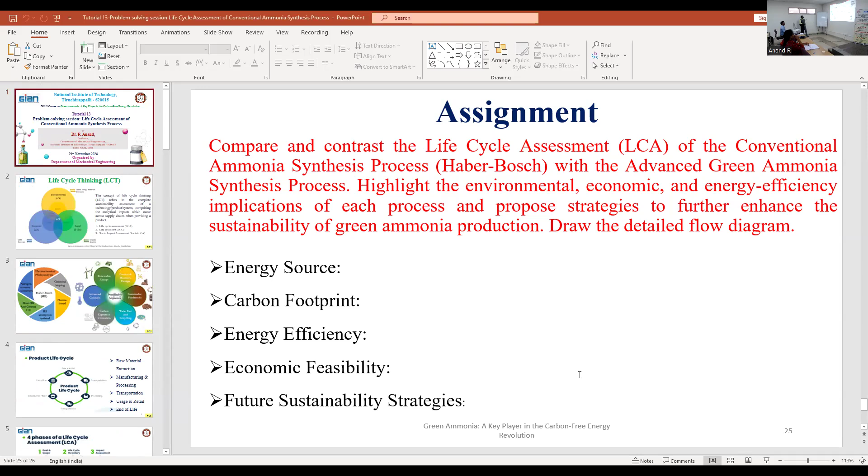The first session, the forenoon session, we have tutorial 13. After the break, we have tutorial 14 that we are going to take to our department for demonstration of the solar photovoltaic, how renewable energy can be brought in for ammonia generation. Then we are going to demonstrate the microwave pyrolysis and thermal gasification system. If possible, we can also give a demo on electrical panels.

This is the most important part of any implementation of the project. For any new projects, government or institute or startup, we need to plan for any new kind of project, and the LCA is very, very important.

We're going to talk about the social, economic, and environmental aspects. When you are focusing only on the environmental perspective, it's called Life Cycle Analysis. If you are focusing on the economic perspective, it's called LCC, Life Cycle Cost. Then if you are talking about the social perspective, it's called Social Life Cycle Analysis.

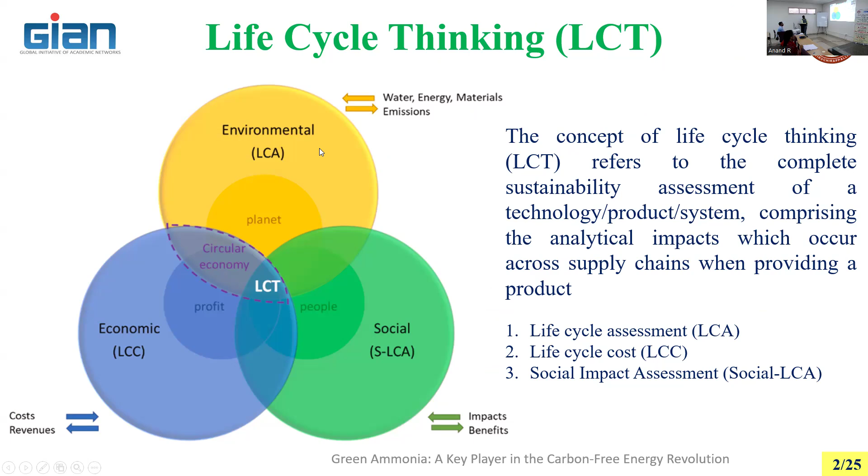Continuation of the life cycle thinking - in this workshop we are speaking about the Haber-Bosch process, and the replacement of Haber-Bosch with a different method, which we have discussed. So the ultimate aim in doing LCA for this Haber-Bosch process is to replace Haber-Bosch with new methods.

So in that case, you need to think about replacing Haber-Bosch with renewable waste-based methods. What are the social, economic, and environmental perspectives for development of this new concept? We are interested in sustainable ammonia. So ultimately, life cycle thinking means we need to produce ammonia in a sustainable manner, by bringing together the three categories of economic, environmental, as well as social analysis.

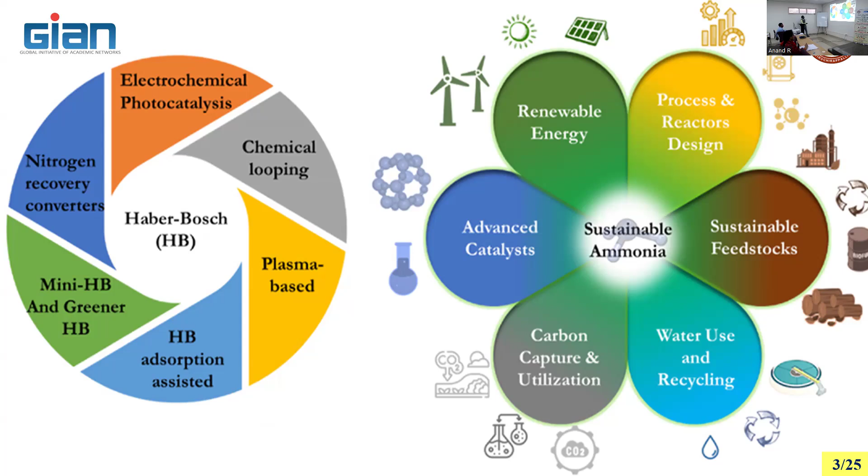So if you are claiming that you're going to produce ammonia from water, then you need to prove that - we are not going to bother about it initially, but the way in which you are producing ammonia matters.

How is it going to be, in terms of social perspective, economical perspective, and environmental perspective, superior to the Haber process? You need to prove that. Then you can refine it later.

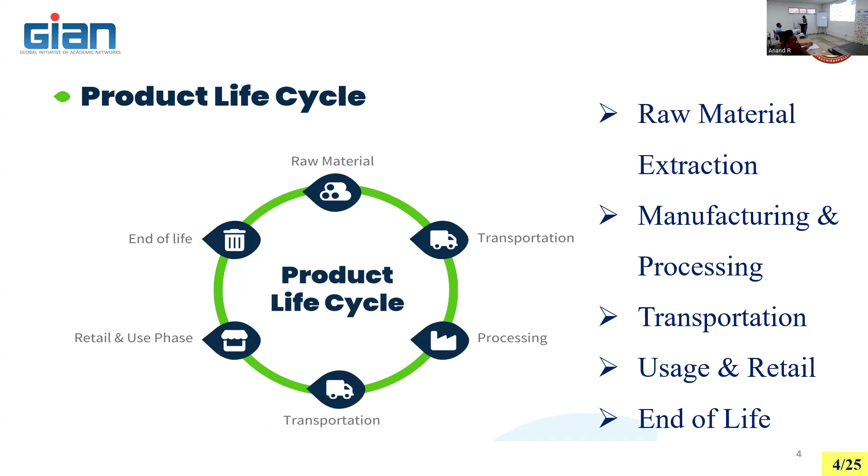You cannot replace the Haber process as the way of ammonia generation. But every government is putting stringent emission norms, and per ton of ammonia, how much cost you are going to spend, everything matters. So in that case, you cannot do an experimental study to come up with a solution. You need to depend on some kind of tool to find out the life cycle of the particular system, analysis in terms of economical, environmental, as well as social.

Okay, there are 4 phases of life cycle assessment. First one, goal and scope. What is the goal? What is the scope of doing that? Is it necessary to move to renewable energy from the conventional way of producing hydrogen from methane, natural gas, and converting the hydrogen into ammonia through Haber-Bosch? It is a proven technology. Why do you need a renewable based way of producing ammonia? You must have a goal and scope. When you want to suggest something to the customer, you need to have a concrete goal, what for you are going to bring the technology.

Then what is the life cycle inventory? Suppose how much you are providing. You can think about plastic. The raw material, maybe polymer, is entering. But what is the outcome of that particular plastic? It is not going to be consumed again, it must go to input again. So we are not utilizing plastic properly. The life cycle inventory is very, very important. That's called circular economy. How much quantity you are consuming, whether you are able to reuse it back for the same process for getting the product. So the life cycle inventory is also very, very important.

Then you need to do the impact assessment: economic, environmental, and social impact analysis. Then finally, you need to interpret it by combining 1, 2, 3, whether the technology you are bringing for replacing the conventional method is going to be at an acceptable level or not. Okay. So you define the goal and scope, do the inventory analysis, the impact assessment, and the interpretation.

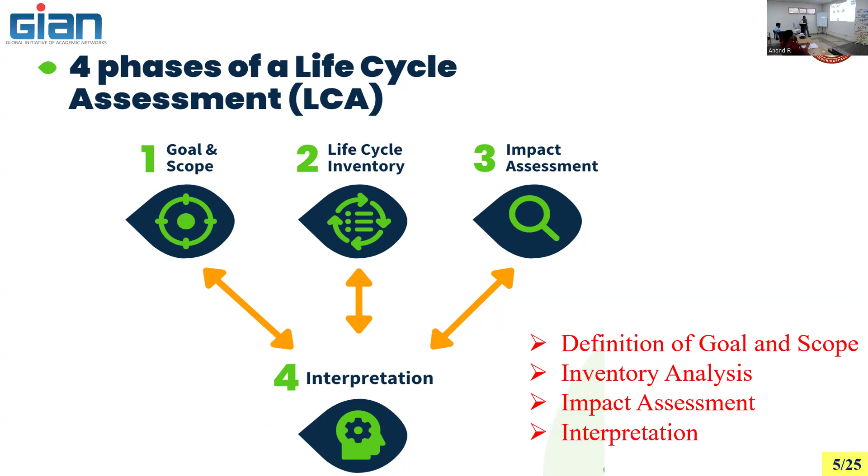So different types of models: cradle to grave, cradle to gate, cradle to cradle, gate to gate, well to wheel. These are the different methods of designing the model. Among the 5 things we are proposing, this is very, very important: cradle to cradle. The animal or human is born in the environment, and again it goes back to the environment. That's called circular economy. That's called cradle to cradle.

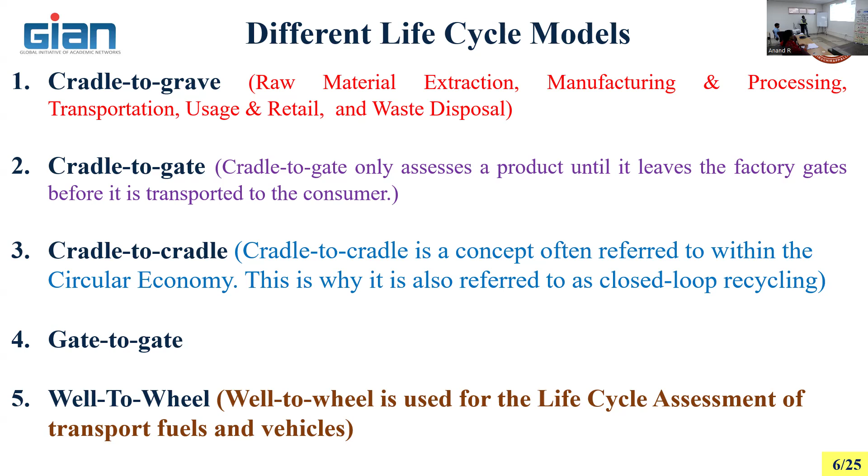Cradle to cradle means the same industry will be collecting all the waste material, and it is going to be taken into reuse. It's called cradle to cradle. Gate to gate means the industry is selling, and someone is going to collect it. For all the 5 things, right, you need to think about the 3 perspectives: economic, social, and environmental. So different life cycle models are there.

Cradle to the grave. So in raw material extraction, a lot of inputs you are taking, and a lot of outputs are also coming out in the form of money, emissions, electricity, everything. As input you are going to consume some kind of heat or power. Similarly, here also you are going to consume, and the output is going to be the product or heat or the emissions. So there are the different steps.

To go from cradle to grave, you go from the raw material extraction to the material manufacture, then product manufacture, then use stage, then the end of life. So you are going to come across different steps to reach the final grave. In that, so many inputs and outputs are involved. You take all the inputs and outputs accordingly, then if you give them to the life cycle model, you will get the proper outcome.

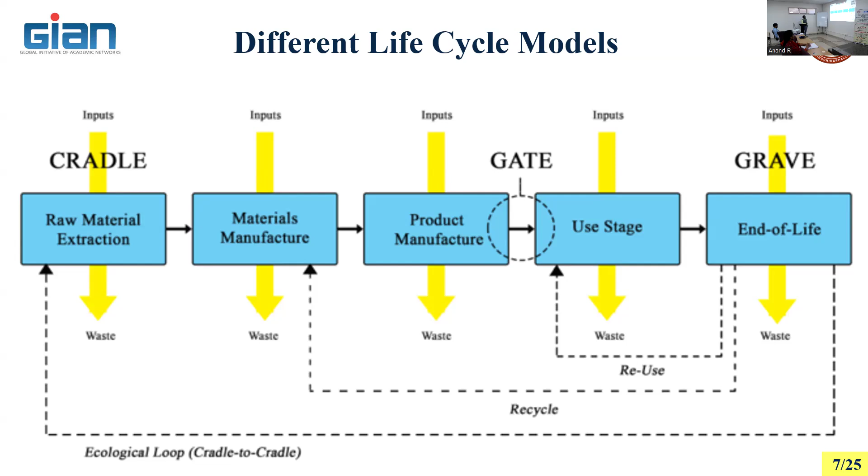The goal and scope of a life cycle assessment: define the functional unit, define a system, define limits, carbon analysis. Life cycle inventory analysis is essentially the data collection of our LCA. It looks at the environmental inputs and outputs of our product or service. Suppose we want to do the analysis for a Haber-Bosch process. Several data are available. No need to run a Haber-Bosch reactor to get the data.

There are millions of publications available on the Haber-Bosch process, right? So you can collect whatever inputs are necessary. There are papers available. You can collect the data, or you can send a request to the industry and get the data. Accordingly, you design the life cycle system. So what could these inputs and outputs be? Raw materials and resources, different types of energy, water. These are all data you can easily get from the industry.

They're already running the conventional method of producing ammonia, so you can use it. Some data are available, maybe with some standards. You approach the industry, or you can approach the suppliers. Somehow you need to get the data, or suppose you have a small reactor of 100 kg or something, you can run the reactor and get the data also.

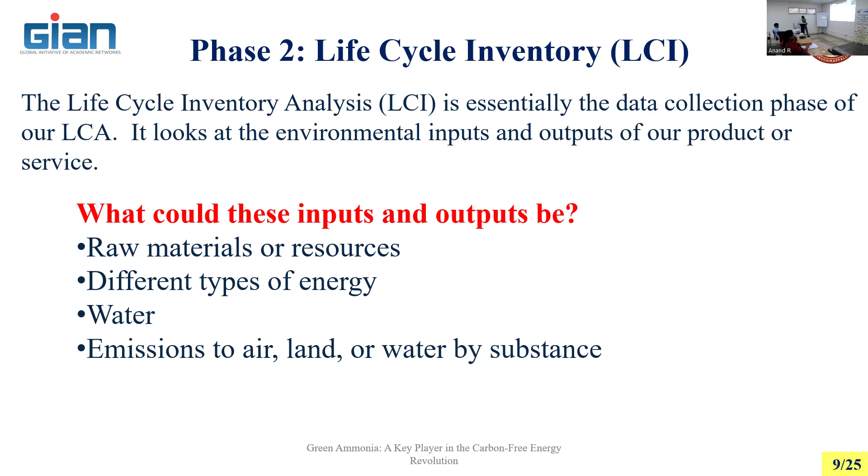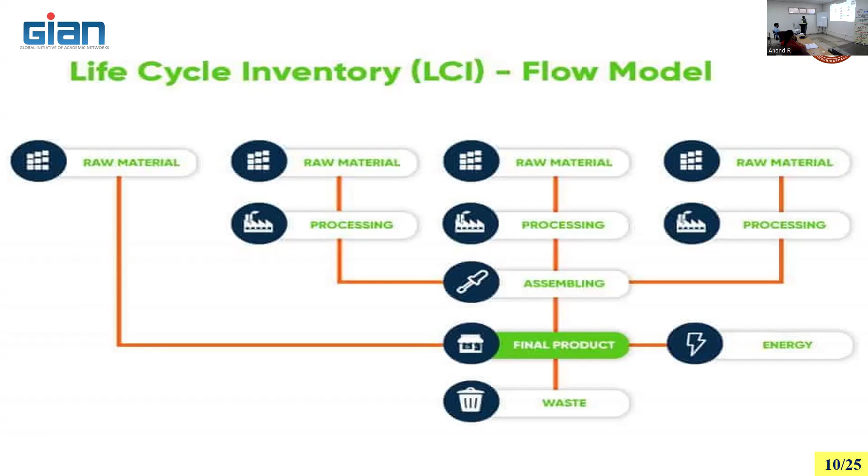Normally, even some of the gases are not going to be converted into hydrogen, maybe in the steam methane reforming. Then methane also comes out in the reactor. Maybe sometimes leakage also happens. So every constituent you are going to relate to CO2 for doing the global warming potential study.

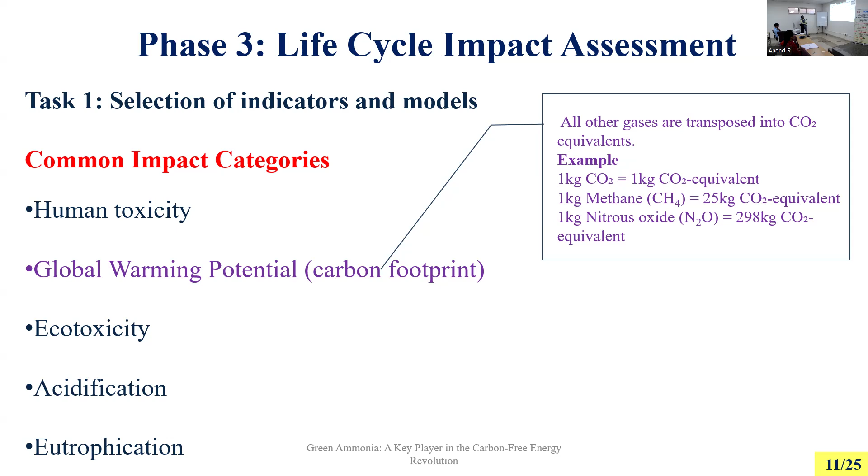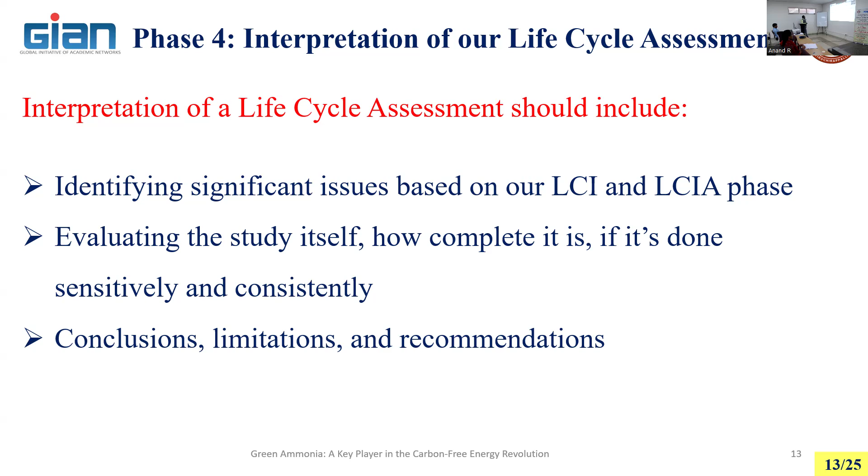Interpretation of life cycle assessment should include identifying the significant issues based on our LCI and LCIA, evaluating the study itself, how complete it is, if it is done sensitively and consistently. Finally, you need to conclude limitations and recommendations. The conclusions drawn from life cycle analysis are how high are the emissions of the product or service, how does it compare to other products in our portfolio, what are the biggest leverages to reduce the impact of our product, can we be more efficient in manufacturing.

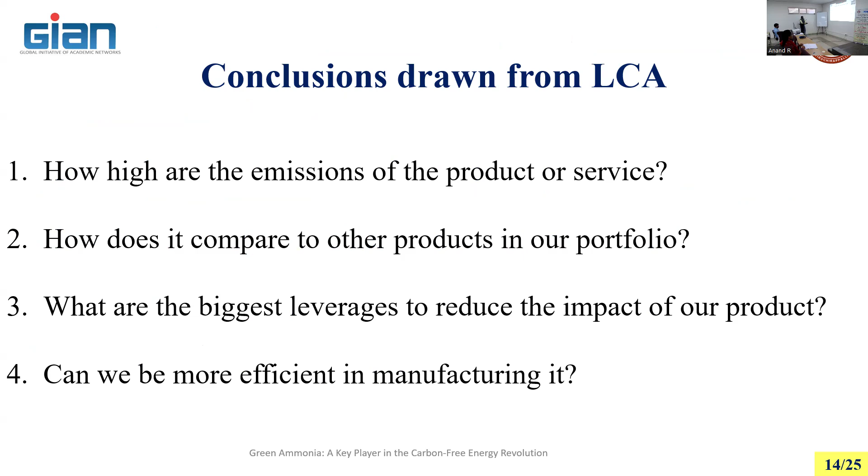The ultimate aim is you are going to provide the most efficient method of producing the product if you are able to do the life cycle analysis. So some inputs you need to take for the analysis. If you want to ship, ocean shipping, you need to take energy, metric tons. These values are all available. Similarly, the carbon footprints are available for different applications, right? Family car, hybrid gasoline, right?

Energy in terms of megajoule per metric ton with respect to the kilometer is also given. So all the data you are able to get. Data are available. You can use it for your analysis. Because we don't know about your manufacturing industry or your process, what are all the factors you are going to really involve. So there are several factors available, data are available. You can pick up the relevant data for the analysis.

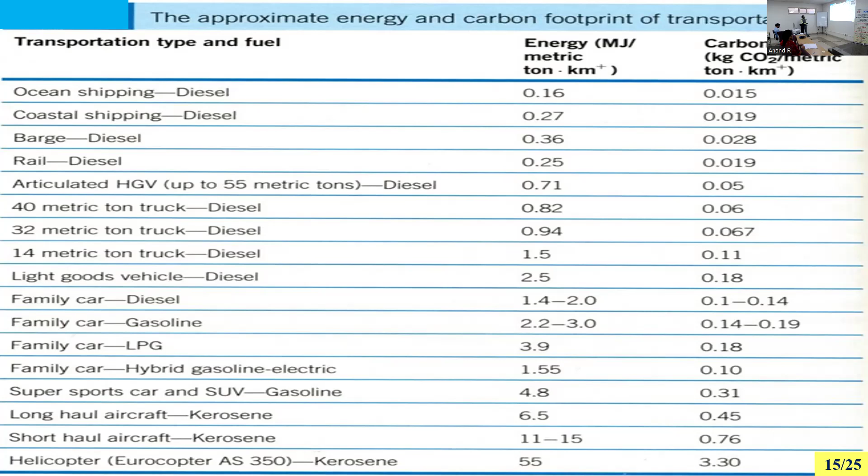Okay, so in case of Haber-Bosch by using nuclear energy for producing ammonia. This is one way you can design the system. You are going to use uranium. So in uranium extraction, lots of energy is involved, lots of emissions are involved, lots of people are involved. Then you are going to take the uranium into a nuclear power plant and produce the electricity. So many inputs are coming, so many outputs also. Not only producing electricity, you are also producing toxic emissions, or the nuclear waste, which is very hazardous. You take all that into analysis.

The electricity comes from the nuclear reactor, a pressurized water reactor or something, in the case of nuclear energy. That electricity can be used for electrolysis. In the electrolysis, the inputs are electricity, water, then nuclear heat. Outputs are oxygen, hydrogen, along with heat. Suppose you are using some hydrocarbon other than water in the electrolysis process, or the reforming process from the electrochemical method. Then other products also will come.

So here we are using water, so you will get hydrogen and oxygen. The other things are also taken into account; heat will also come up. Water leakage is also sometimes going to happen in the reactor or through the transportation, right?

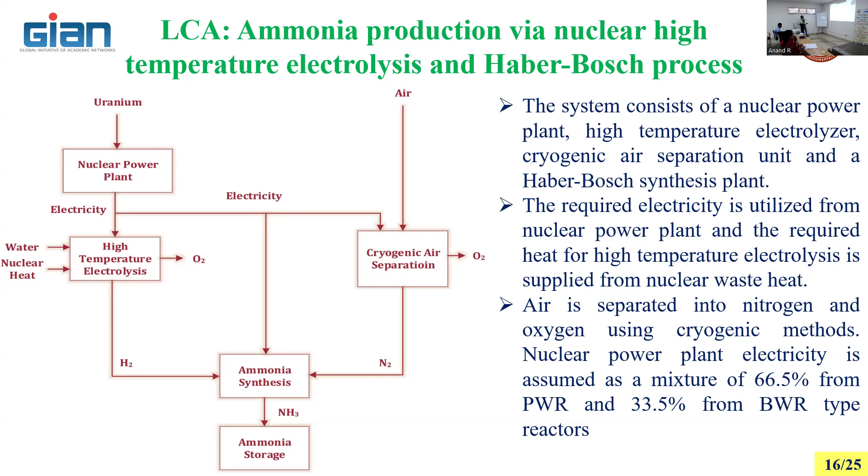This is the simple one. But don't assume that this is the only one. For easy understanding, we prepare the flowchart like that. Suppose we are using biomass as a material, municipal solid waste as a material, or hydro as the energy for producing the power. If we are talking about biomass, the energy you are absorbing from the sun to produce the biomass, then harvesting, transportation, then bringing the biomass into the required size. All those things you take into account.

Then during transportation, some biomass you are going to lose somewhere. So everything you take into account for producing the power. Biomass you take either to the thermal power plant or to the gasifier or pyrolyzer, where you can produce other products, then you can produce the power. Okay. So ultimately here the input power comes out. First one is nuclear, next one is from biomass, municipal waste, or hydro.

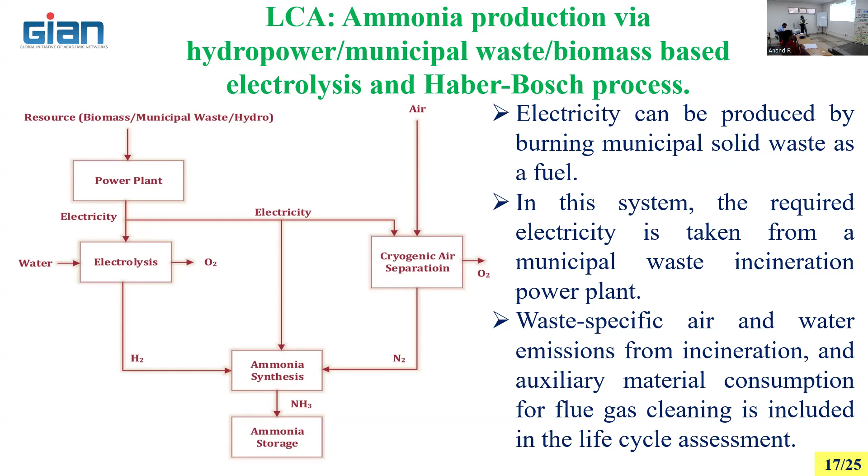So whatever inputs are entering in terms of energy or mass, and the outputs in terms of mass, energy, and emissions, the other things remain. Okay. This is a continuation of the previous one. If you are consuming energy from hydropower, you need to take the different inputs in terms of water flow or the conditions in which you are going to provide it into account for producing the electricity. The other things are the same.

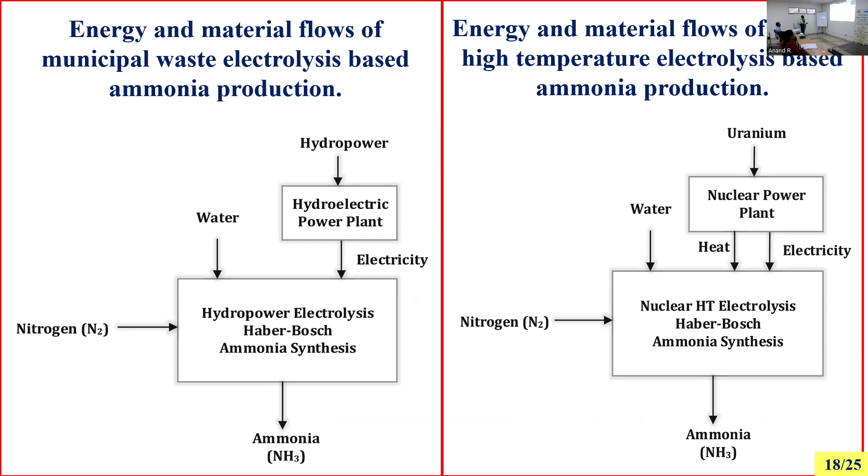This diagram shows you can also combine two forms of energy. One is hydropower here for producing hydrogen and combining hydrogen into ammonia. There are two different sources they tried here. One is hydropower, another one is nuclear. If you have electricity, you can use any type. That is the thing you want to bring here. Then you are comparing the different ways of using the power from an energy efficiency perspective.

So exergy efficiency: the work potential for the given heat input, how much work you can extract to the maximum level, taking the surroundings into account as well.

So you can see hydropower, the work potential is going to be very high. Suppose we are producing, I can say, 100 as the input, the output is 46.4. So the conversion is about 46.4% from the input. Then the nuclear is about 20.4 and biomass is about 15.5 and I can say municipal waste is 10.3.

Assume that if you are adding 1 kg biomass, then the conversion is going to be, I can say, 1,000 grams. You can say the conversion is only here 15 grams. Okay. So here municipal one is only 10 grams. Because the calorific value is very low, that is the reason why the energy efficiencies are, I can say, very low.

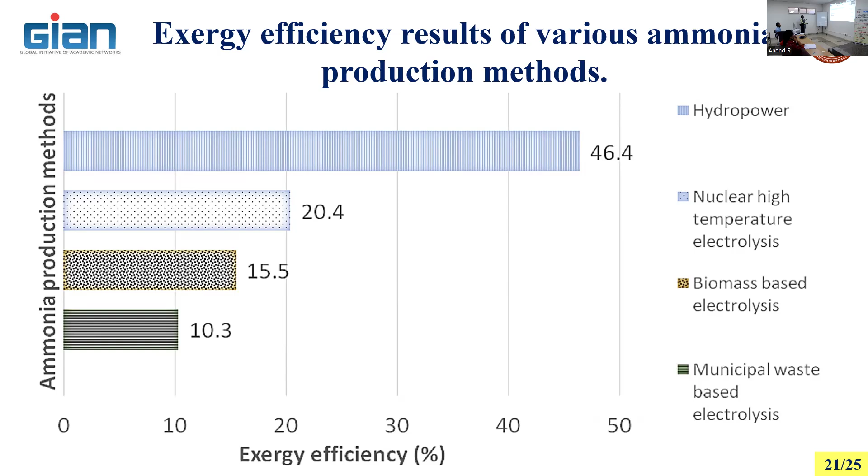Okay, exergy efficiency of various ammonia production methods we have proposed, right? So ammonia from municipal, then ammonia from hydro, ammonia from nuclear, ammonia from biomass. So you can see here, among the 4 methods we are proposing, the major CO2 emissions are going to be maximum from the biomass electrolysis. Next one is the nuclear. Then the hydro is going to have the minimum CO2 emissions.

Then you can say from hydropower, this is, what is this? Municipal solid waste. So this is another advantage you can see here. By going for municipal solid waste, we can see that the minimum CO2 emissions are coming out. This is the positive sign. That means we can use the municipal solid waste for producing electricity or heat, and the amount of CO2 that comes out is going to be very low. The CO2 emissions are very low because most of the constituents present in the municipal solid waste are less carbon in nature.

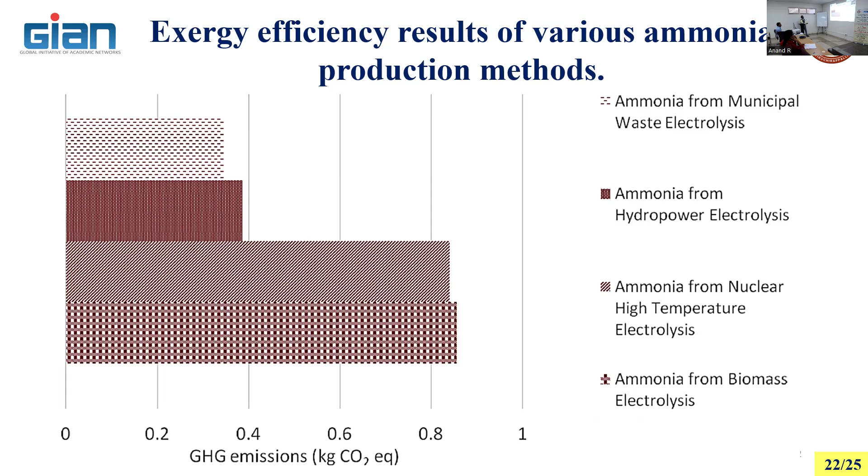Okay. So this is the general layout of the life cycle analysis. So we need to find out some method in which you are going to do the life cycle analysis. Internationally, we can say ISO 14040:2006. This is the standard available. In order to do any kind of analysis, you need to follow the standard. It was proposed in 2006 for cradle to gate, gate to grave and cradle to grave. These are all the standards available for collecting the data to do the analysis, right?

So ultimately, you need to collect the data. You need to use the database, and you must have the maximum amount of data to get good output from the life cycle analysis. So there are databases. You need to create a database and feed the data into the software tools. There are tools available: Ecoinvent, GaBi, SimaPro, and OpenLCA. So in order to store the data as well as to do the analysis, there are some softwares available.

So in NIT also, we are trying to procure this, because life cycle analysis is very important. Most of the journal papers now consider it only if some kind of new things are happening, available in the literature, right? In the paper. So in that case, if any of your work contributes, for example, if you are doing some kind of catalyst process or new catalyst, right? There also you can do the LCA. Okay. So GaBi, SimaPro, and OpenLCA softwares are available.

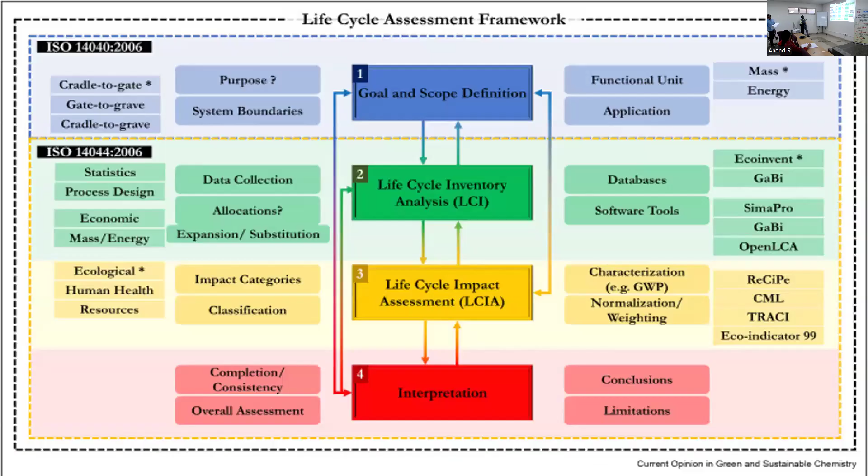Suppose you are going to do the life cycle analysis, right? So you need to find out some parameters. What are the input parameters? What are the output parameters? So you need data also.

I'm not expecting any data from you. I want to know how to start the life cycle analysis—no diagram, just why we are going to bring this in. This is why we need to provide electricity, provide heat, provide air, and separate out the nitrogen.

Some systems are necessary, so unless you write the flow chart including the components involved in the process, you cannot come to the results. Maybe the LCA process needs 1,000 components, but at least you should cover around 100 components to get some results. The results may not be fully acceptable.

Then you can go to the reverse approach. So what are the things still expected for doing the life cycle analysis? Please try it.

Or you can take any one process among these. Say I want to produce ammonia from coal—one person can do that, and bring in CCS. So what may be the system diagram? This is only a simplified diagram, right?

So you need to bring in the mass flow, energy flow, and emissions perspective also. Social, economic, as well as environmental factors—you need to bring all of that in.

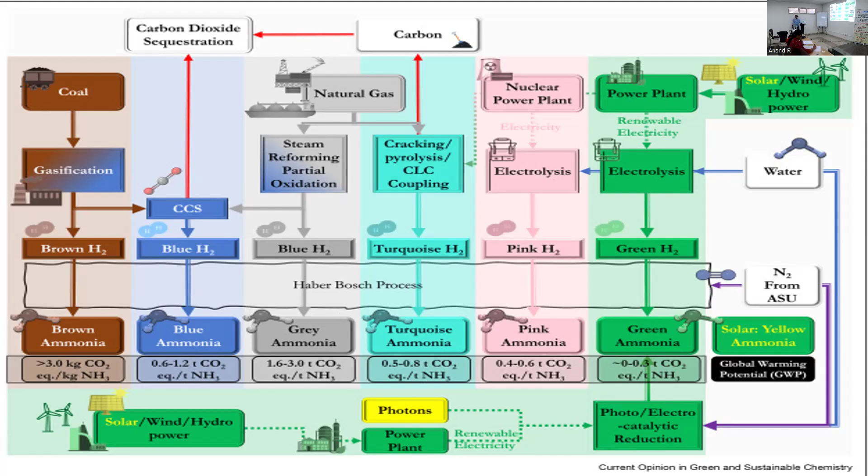By doing this analysis, you can understand that there are so many components involved in getting the product, in terms of social, economic, and environmental perspectives. So many things are involved, and now you need to add that into your product.

People are saying that you are using this particular system and producing so much CO2. Unless you have a complete study, you cannot prove that you're not producing CO2 emissions more than what is given by the government. This study will help you for it.

Even for fixing the product cost, this is very important, because you want to design a new product and fabricate it. If you are able to do this LCA study, bringing all three components into account - manpower, environmental perspective, and economic perspective - then you will not get any loss. Suppose you are designing a product for 100 rupees by completing all the research and LCA analysis, then you may not get any loss in that particular product.

Some products are really successful, some are not. They put some value and after some time companies get a loss, right? Because they didn't do the proper analysis. The life cycle analysis will be helpful not only for getting a good product but also a good way of producing the product.